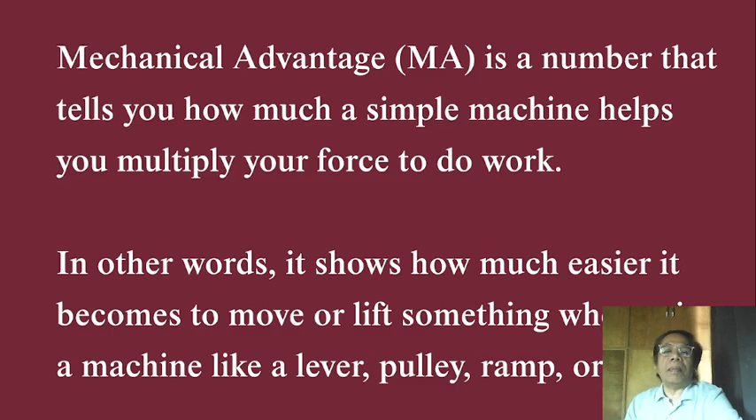Lesson number 27, Mechanical Advantage. Mechanical advantage is a number that tells you how much a simple machine helps you multiply your force to do your work. In other words, it shows how much easier it becomes to move or lift something using the machine, like a lever, pulley, ramp, and others.

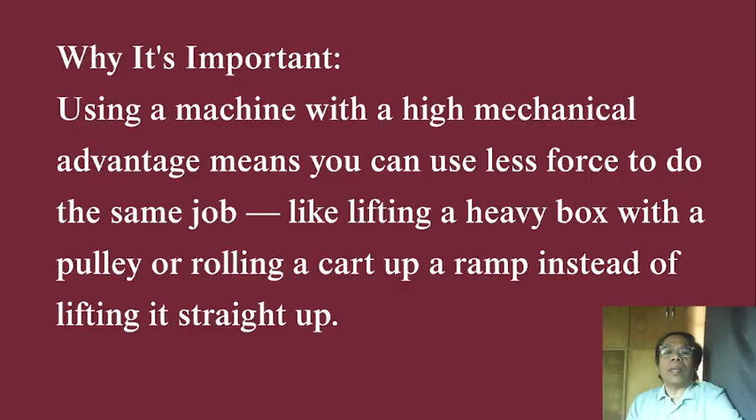Why is it important? Using a machine with a high mechanical advantage means you can use less force to do the same job, like lifting a heavy box with a pulley, or rolling a cart with a ramp instead of lifting it straight up.

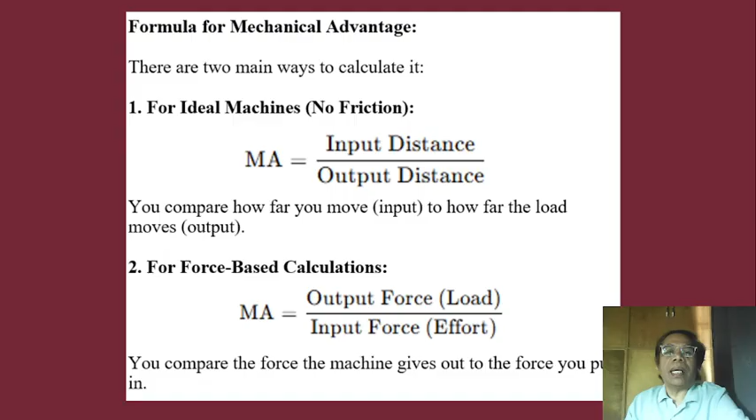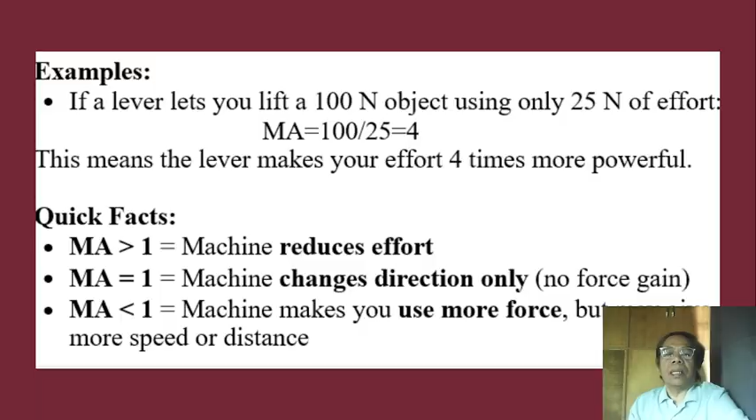Quick facts. If MA is greater than 1, the machine reduces effort. If MA is equal to 1, the machine changes direction only, no force gain. If MA is less than 1, the machine makes you use more force. Okay, and then practice problems.

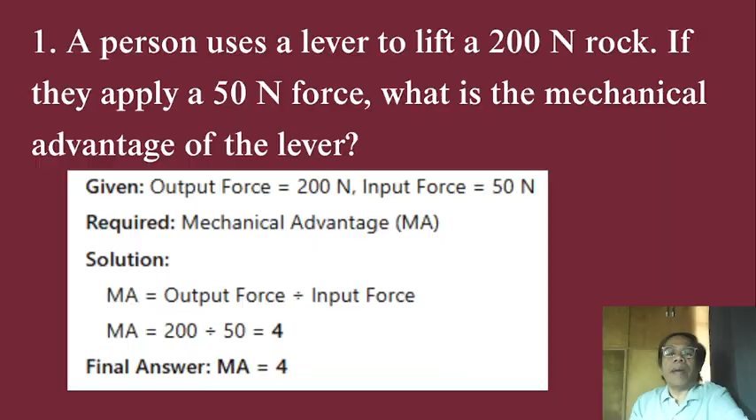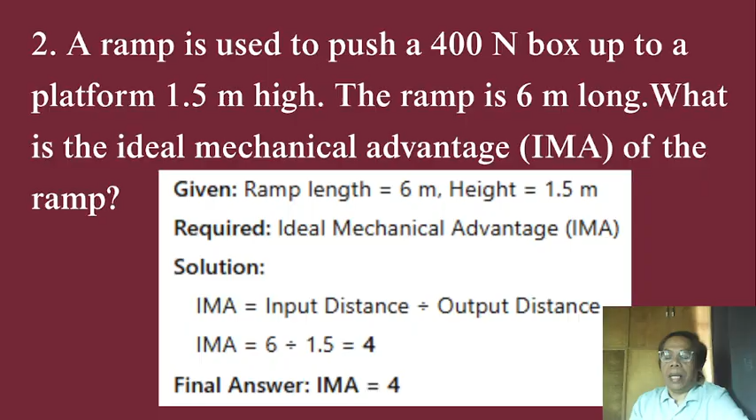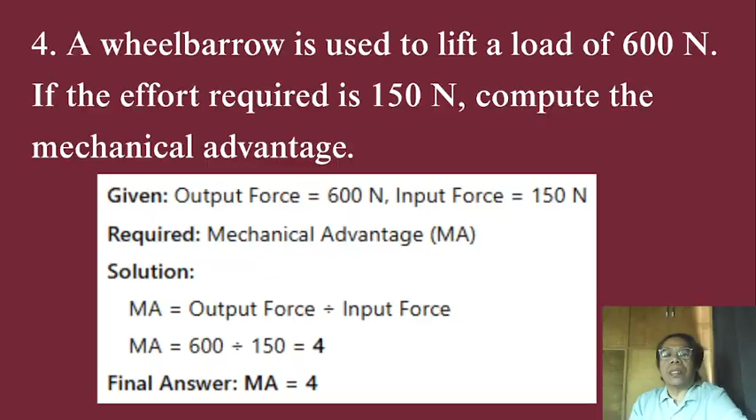Number 4. A wheelbarrow is used to lift a load of 600 Newton. If the effort required is 150 Newton, compute the mechanical advantage. Given output force 600 Newton, input force 150 Newton, required mechanical advantage. So solution, use the formula MA is equal to output force over the input force. Substitute the given data. The final answer is 4.

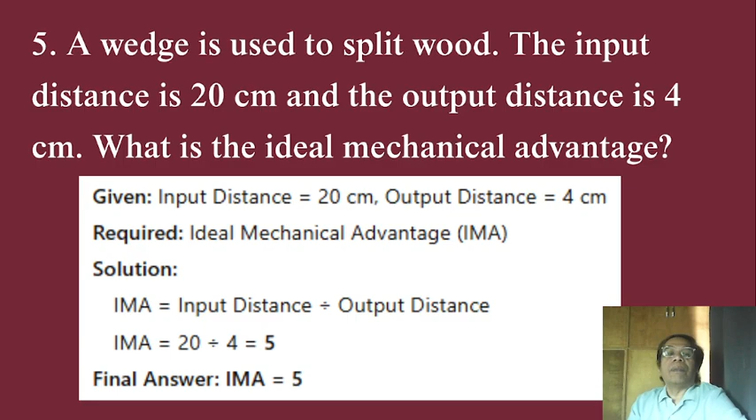Number 7. A screw has a pitch of 0.5 centimeter and a handle length of 6 centimeters. Calculate the mechanical advantage of the screw. Okay, so there is something wrong with the solution of problem number 7. Most probably this is the solution of problem number 6. So sorry for that. So just cross it.

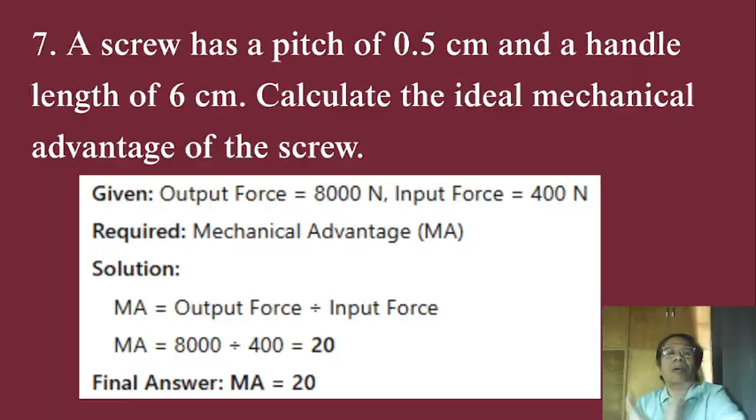Okay, so number 8. A person uses a crowbar and applies a force of 120 Newtons at a distance of 1.2 meters from the pivot. If the load is 480 Newtons located 0.3 meters from the pivot, what is the mechanical advantage? So given: effort 120 Newtons, effort arm 1.2 meters, load 480 Newtons, load arm 0.3 meters.

So solution: mechanical advantage is equal to the effort arm divided by the load arm. So the final answer is 4. Or you may use output force over the input force, 480 divided by 120. Of course, the answer is still the same.

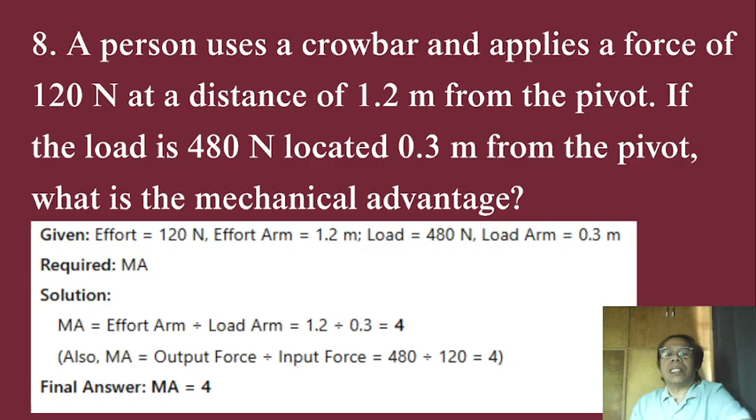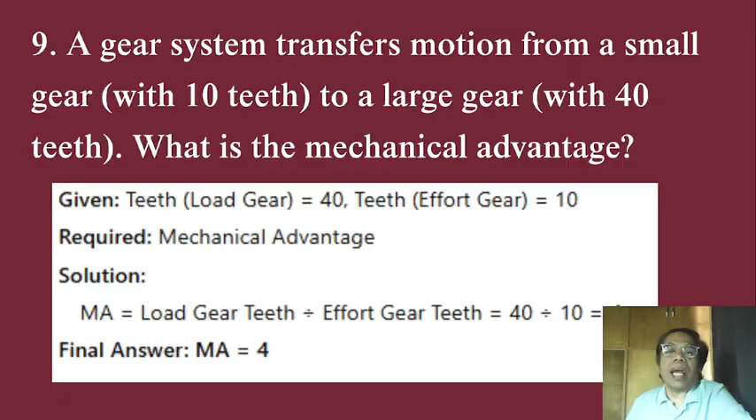Number 9. A gear system transfers motion from a small gear with 10 teeth to a large gear with 40 teeth. What is the mechanical advantage? Given the teeth for the load gear is 40, the teeth for the effort gear is 10, so required: mechanical advantage. Mechanical advantage would be load gear teeth divided by the effort gear teeth. Substitute the given data and the final answer is 4.

And then MCQ for lesson 27, mechanical advantage. Number 1. What does mechanical advantage measure? Letter A, the energy consumed by a machine. Letter B, the output force divided by input force. Letter C, the speed of a machine. Letter D, the total work done by the machine.

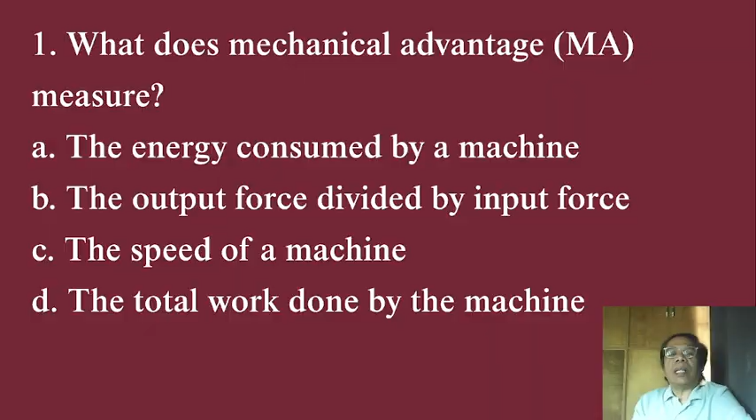Number 2, which formula represents actual mechanical advantage? Letter A, AMA is equal to input force over the output force. Letter B, it is equal to output distance divided by the input distance. Letter C, AMA is equal to output force divided by input force. Letter D, AMA is equal to input distance times input force.

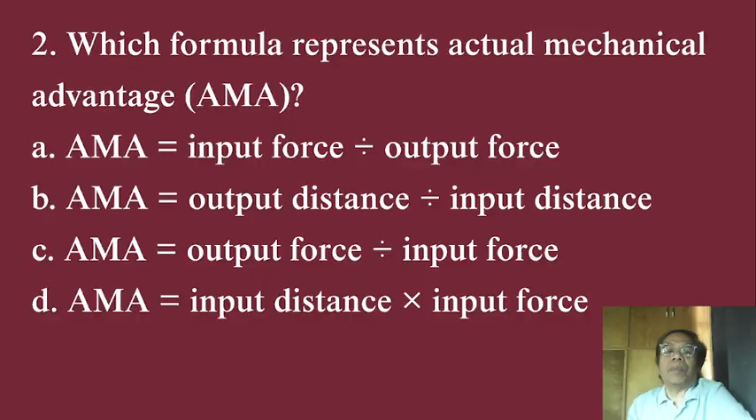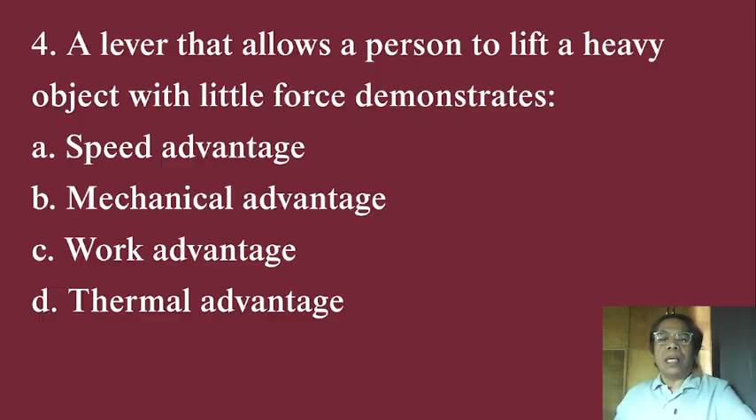Number 4, a lever that allows a person to lift a heavy object with little force demonstrates: A. Speed advantage, B. Mechanical advantage, C. Work advantage, D. Thermal advantage. Number 5. If a machine has a mechanical advantage greater than 1, what does this mean? Letter A. It decreases the input force. It increases the speed. It reduces the output force. Letter D. It increases friction.

Number 6. A machine with a mechanical advantage of 1 means: A. No force is needed to operate. Letter B. There is no friction. Letter C. Input force equals output force. Letter D. Work input is greater than the work output.

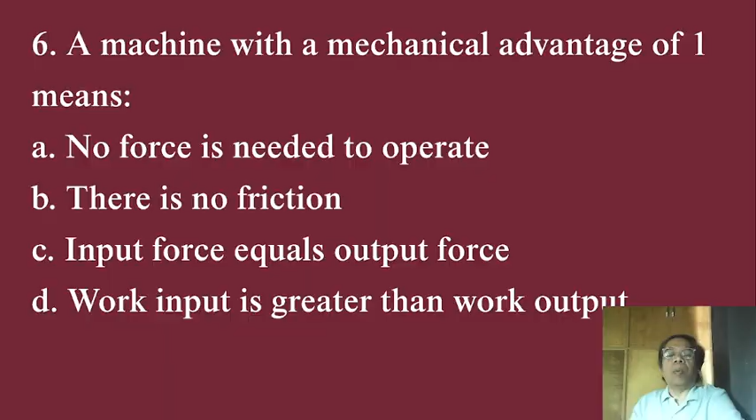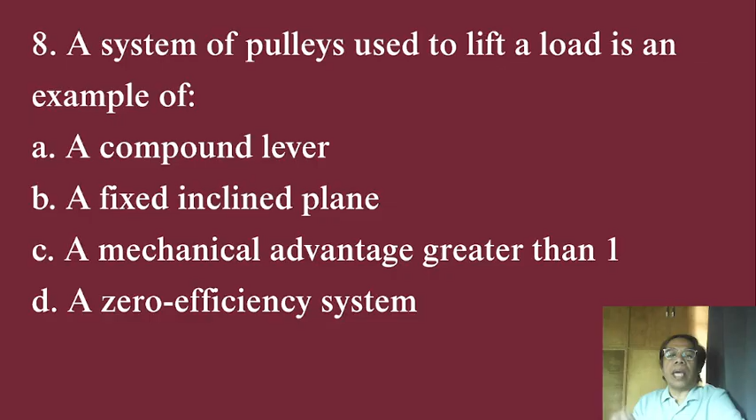Number 7. In which simple machine is mechanical advantage calculated using the formula IMA is equal to ramp length divided by the ramp height? A. Pulley. B. Lever. C. Inclined plane. D. Wheel and axle. Number 8. A system of pulleys to lift a load is an example of: A. A compound lever. Letter B. A fixed inclined plane. Letter C. A mechanical advantage greater than 1. Letter D. A zero efficiency system.

Number 9. Which statement is true about machines with high mechanical advantage? Letter A. They always move fast. Letter B. They require more input force. Letter C. They multiply force more than distance. Letter D. They never lose energy.

Number 10. Which simple machine uses a rotating rod and threads to multiply force? Letter A. Lever. Letter B. Pulley. Letter C. Screw. Letter D. Wedge. Answer key for lesson 27. Please proceed to lesson number 28.

Answer key for lesson 26, understanding the pulley, simple machine. Number 1, B. Number 2, C. Number 3, B. Number 4, A. Number 5, C. Number 6, C. Number 7, C. Number 8, C. Number 9, C. Number 10, C.